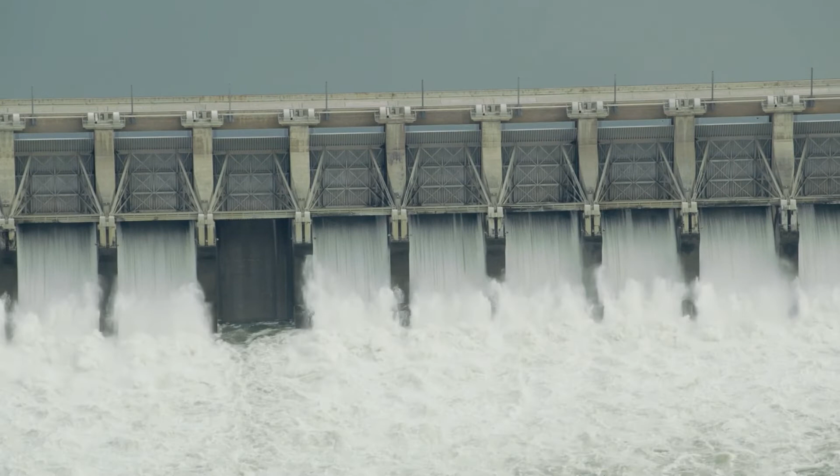Most building greenhouse gas emissions are the result of burning fossil fuels for heating energy and domestic hot water. We want to focus on moving towards electricity. Luckily, in British Columbia, we have some of the cleanest electricity in the world. BC Hydro maintains 93% of its energy to be generated from clean or renewable resources as part of BC's Clean Energy Act. The majority of BC Hydro's electricity is generated from hydroelectric dams. There are also some smaller plants made up of wind, solar, and biomass facilities.

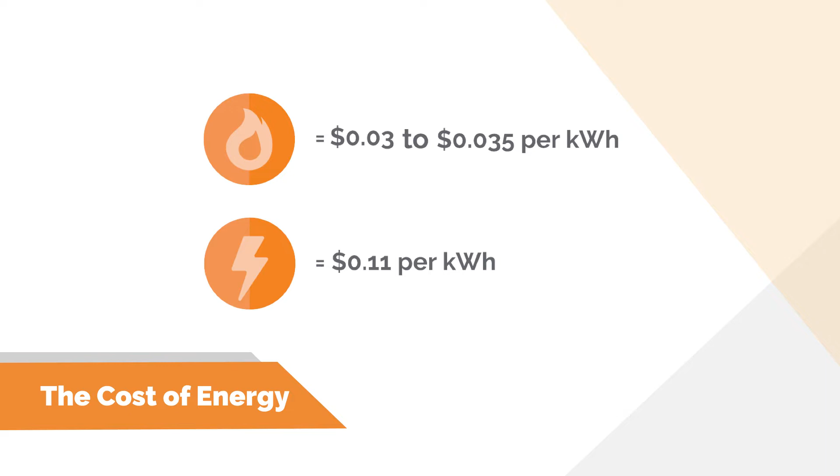BC Hydro's goal is to increase their generation, transmission, and distribution while keeping electricity affordable. Energy storage technologies are improving each year, which helps ensure electricity is kept affordable for the future. With BC's abundant supply of clean electricity, fuel switching from natural gas to electricity becomes the most reliable strategy for reducing carbon in buildings. The main reason for continuing to use natural gas in buildings is that it is still more affordable than electricity. In Vancouver, for example, the cost of natural gas is about 3 cents per kilowatt hour, and electricity is approximately 11 cents per kilowatt hour. There are approaches and technologies available in reducing operational energy costs.

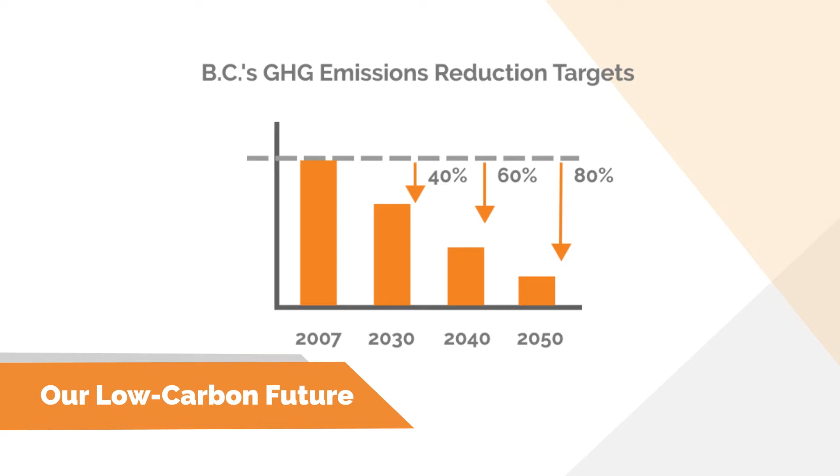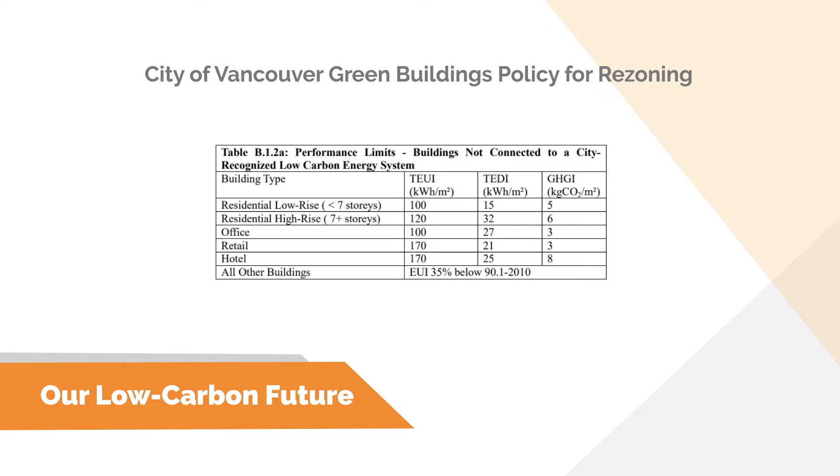The province of BC has set the bar and legislated GHG targets to be 40% below 2007 levels by 2030, 60% by 2040, and 80% by 2050. Many municipalities, agencies, developers, and institutions have recognized these targets and have set their own goals to align with the province. Most of these GHG policies have been written into bylaws and owner technical guidelines. For example, when rezoning in many municipalities, in addition to meeting energy use targets, there are now GHGI targets.

Rebates are widely available in BC for both new construction and retrofits that demonstrate low greenhouse gas emission solutions. These capital incentive programs have recently changed their baseline models from kilowatt hours of energy to GHGI targets as well. If you are an owner or developer, reach out to your consultant team or utility provider to see if you can take advantage of any of these programs.

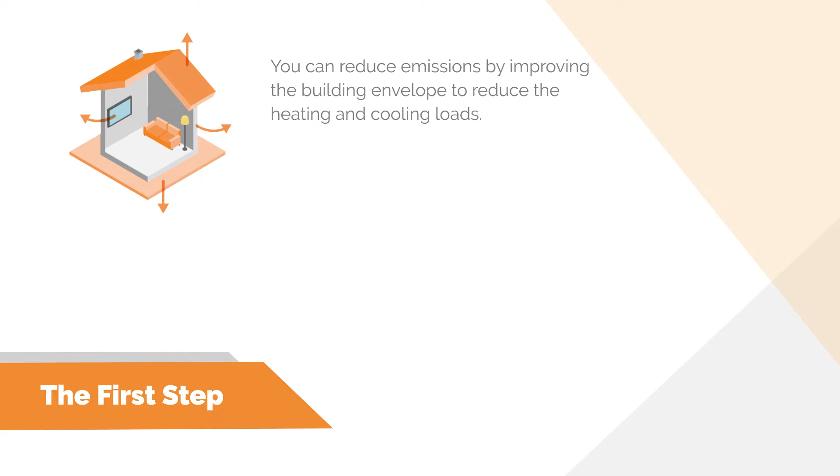The building heating systems are sized based on the performance of the building envelope. The better the insulation or the air tightness, the less amount of heat is required, which is why the first step in reducing our GHG emissions would be to first look at improving our envelope. Similarly, for domestic hot water heating systems, by using low-flow fixtures, we reduce the amount of energy required as we have less water to heat.

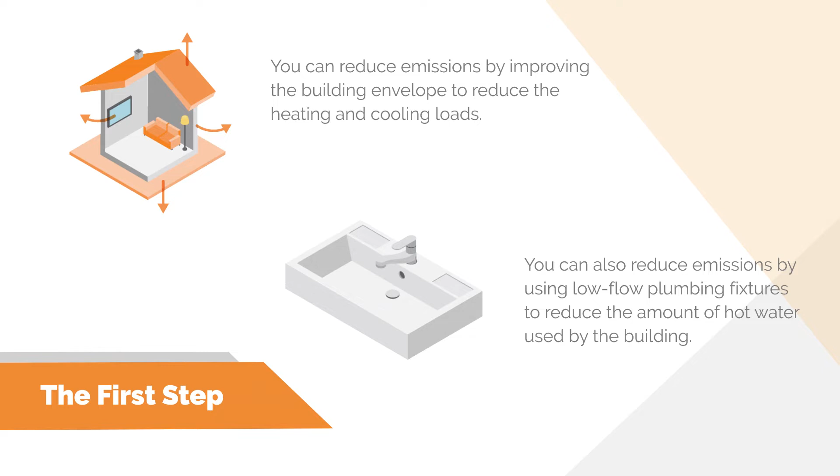There are a number of different types of heating systems for buildings. There really is no one best system. In fact, the best system for the project will depend on a variety of factors: the building type, size, energy targets, ownership, and cost.

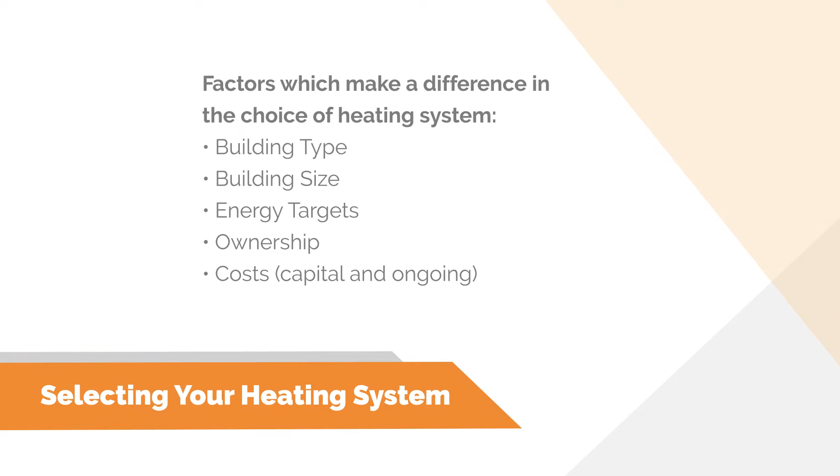Capital and ongoing. Let's review some electric heating system options. This first one is, of course, the traditional electric baseboard heater. This is simply a heating element that will turn on or off as needed to maintain the space temperature. These are generally installed with 1 unit per room. This ensures that the room that needs the heating will get the heating. This is the simple, low capital cost solution and used in many buildings.

It only needs an electric connection and a thermostat as infrastructure. It is a good option for buildings that are only providing heating. The measure of a system efficiency is based on its coefficient of performance, or COP. This is the amount of electric energy that is required to produce heating energy. For an electric baseboard heater, the COP is 1. 1 kilowatt of electric energy in is equal to 1 kilowatt of heating energy out. Although this sounds efficient, there are technologies available with higher COPs.

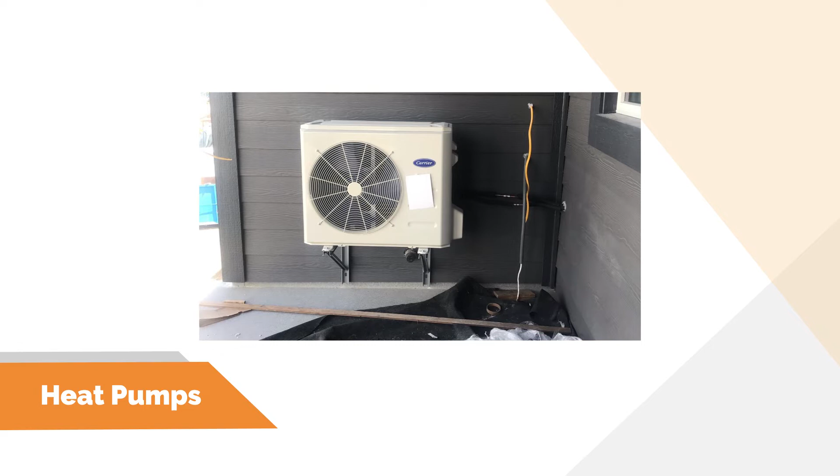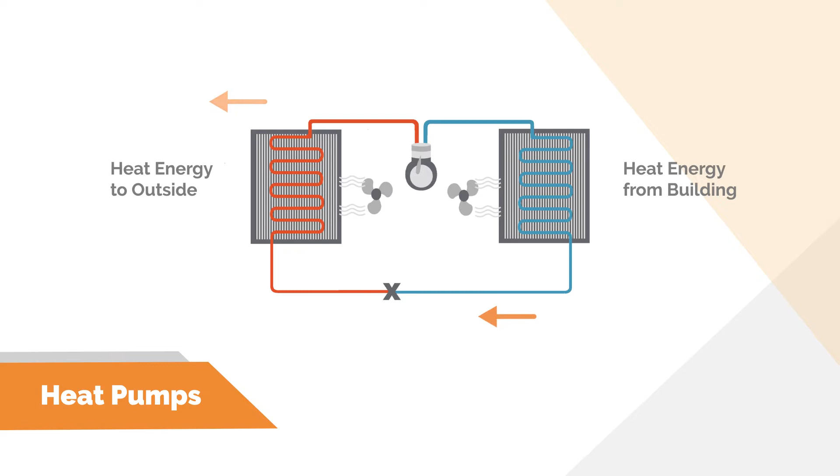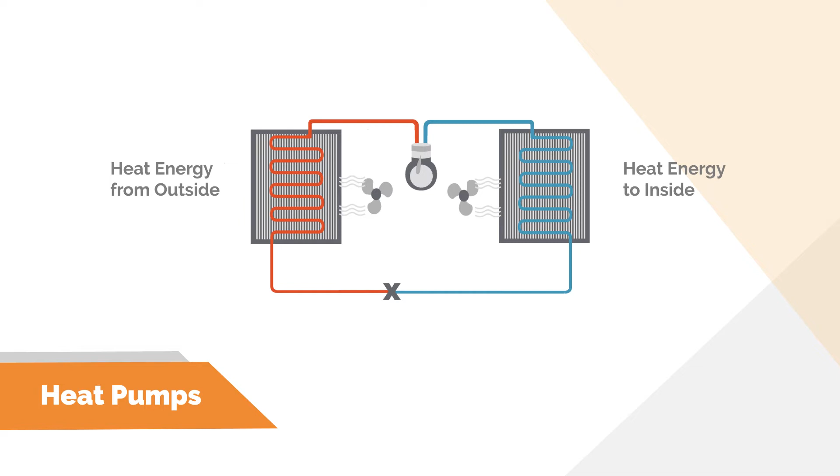The key to efficient electric heating systems are heat pumps. This technology can have COPs upwards of 3, meaning these can have 1 kilowatt of electric energy in and 3 kilowatts of heating energy out. How does this work? An air conditioner uses a refrigerant loop, which includes a compressor to move heat energy from inside the building to outside. A heat pump uses the same technology, just in reverse. It moves the heat energy from outside through a refrigeration cycle, where a compressor powered by electricity adds energy to the refrigeration loop. The system then moves that energy inside the building as heat.

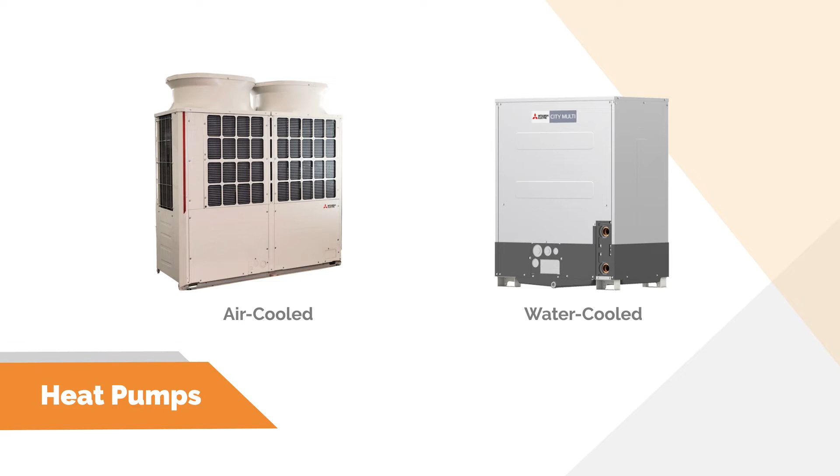With a unit of electricity in Vancouver being 3 times the cost of natural gas, using heat pump technology with efficiencies at 3 times the traditional electric element makes these technologies more cost-effective in keeping energy costs down. Heat pump systems can either be air-cooled, where the heat energy is transferred directly from the atmosphere, or it can be water-cooled, where it transfers it from a ground loop, a loop in the ocean or lake. Regardless of how cold the source may appear, there is still energy to be moved. One of the benefits in using heat pump technology in our buildings is that we can use the same system for both heating and cooling.

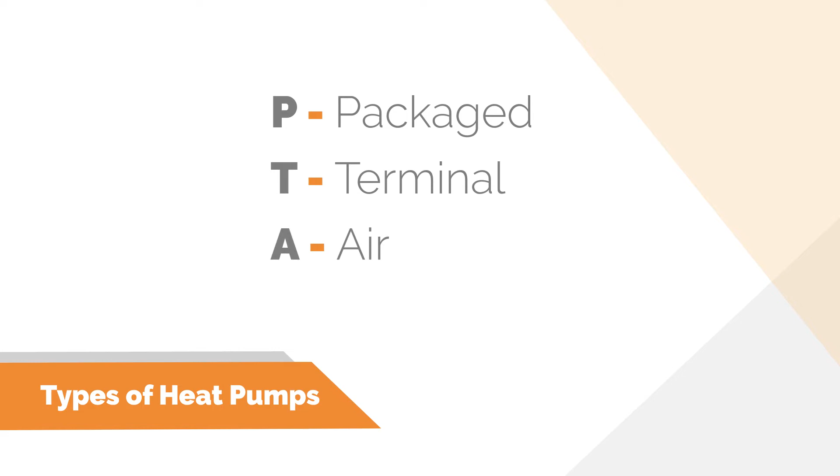There are different types of units that use this technology, and they vary in scale from small one-room units to larger central systems. Packaged terminal air conditioning units, or PTACs, are wall-mounted units installed on an exterior wall, typically below a window. These are small, packaged independent units where the entire system is located within that unit. These can be supplied with heat pump technology. It has a grill on the exterior wall, which is where the energy is moved from the atmosphere into the refrigeration loop and then into the space. The advantage of these units is that they don't need any piping or central plant infrastructure to provide the heating in the space. And with the heat pump technology, they have a high COP. Although they are efficient on their own, there is no benefit in recovering heat from a whole building perspective.

A variable refrigerant flow, or VRF, does provide for a whole building heat recovery system. There are 2 types of VRF, water-cooled and air-cooled. Both are similar in how they operate. However, the air-cooled option is the simplest to provide as a fully electric-based system. The system includes an air-cooled condenser located outside, with refrigerant piping that runs down to the building to all the fan coils in the suites. There's one small additional unit that sits in between the two, called a heat recovery box. This is typically located centrally on each floor, which consists of control valves and sensors. Essentially, it's the brain of the heat recovery system.

How it works is that when one fan coil is in cooling, the heat being moved from that suite is first analyzed by the box. If that system determines that another fan coil in another suite on that same floor needs the heat, it will move that heat to that unit. If there is no need for heat, it will move it up to the condensing unit, where it is rejected to the atmosphere. When the entire building is in need of heat, however, like in peak winter, the air-cooled condensers will operate in heat pump mode and move the heat energy from the atmosphere into the building. This is a simple package system, all supplied by the same manufacturer.

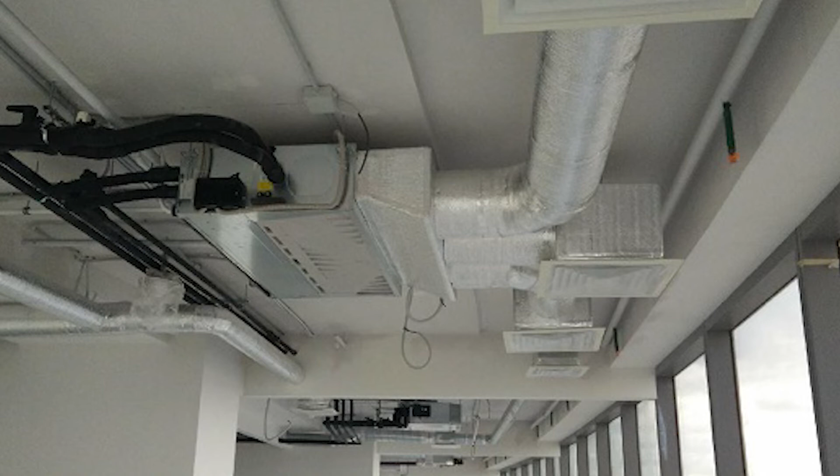This system has a high COP and is a slightly more complex system in that all the components can be from different manufacturers, which requires an independent control system design. This system does allow flexibility with different types of terminal units, like fan coils, hydronic baseboard heaters, or radiant panels.

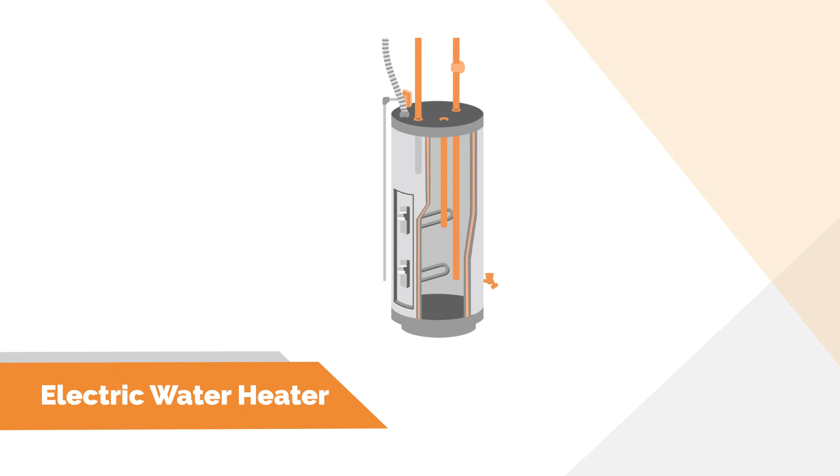Domestic hot water typically uses fossil fuels as a heating source. Similar to a building heating system, we have different types of technologies that can be used in moving to an all-electric based system. The first technology is a simple electric hot water tank. This is a heating element inside a tank that will power on to maintain a tank temperature.

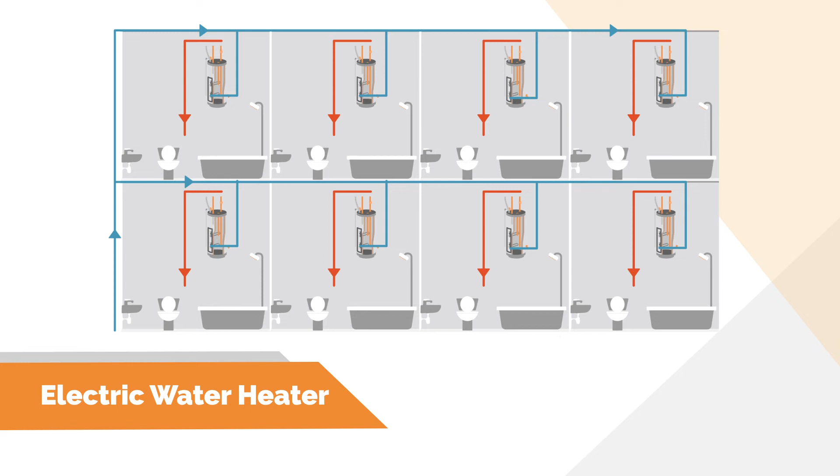This can either be installed as a central system and piped throughout the building to all the suites, or it can be decentralized, where we have smaller electric tanks inside each suite. This is a simple, traditional, low capital cost solution.

For more efficient systems, we need to look at using heat pump technologies again. This is a growing application in BC, mainly because of the many new GHGI targets that are being implemented, as discussed earlier. There are a few different methods for domestic hot water heat pump applications. These all have COPs upwards of 3 or more, making these more efficient than the typical electric domestic hot water tanks.

In a decentralized system, we can have an all-in-one domestic hot water storage tank and air-source heat pump packaged together. These units are generally smaller tanks, similar in size to the one you would have in a single-family home. The heat pump itself sits on top of the tank and will move the energy from the room into the water in the tank.

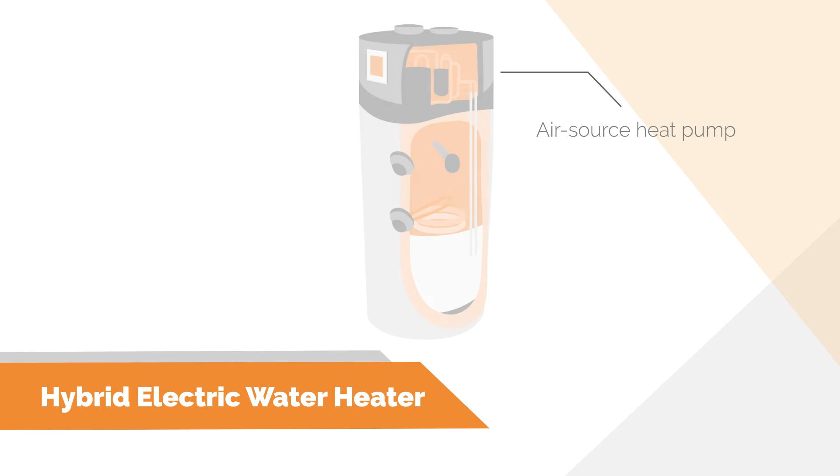This unit is best installed in a space that will generally remain warm, like a furnace room or utility closet. These include their own package controls and require no additional infrastructure, similar to a traditional electric hot water tank. We can also use the same type of air source heat pumps as we would for the building heating system for domestic hot water heating.

A central unit outside, piped with hydronic water into a domestic hot water storage tank where the water is heated and then piped to the suites in the building. This is a more complex system from a controllability perspective, however it allows flexibility in using different manufacturers for the different components. It also requires more infrastructure and is found to be most cost-effective in larger buildings.

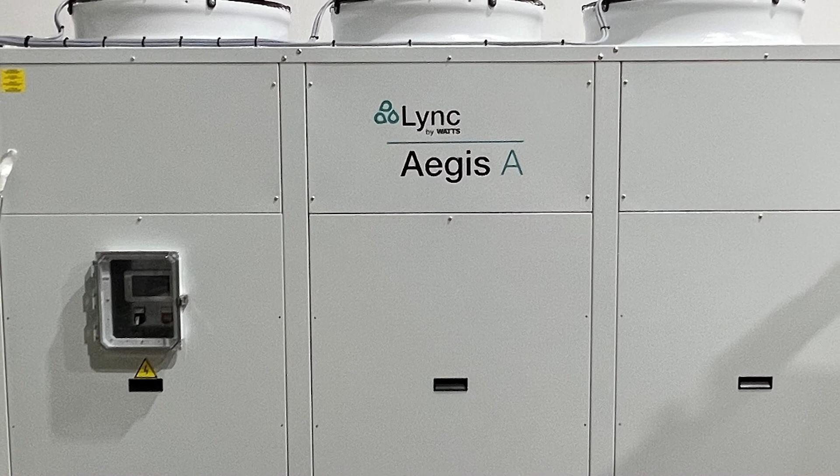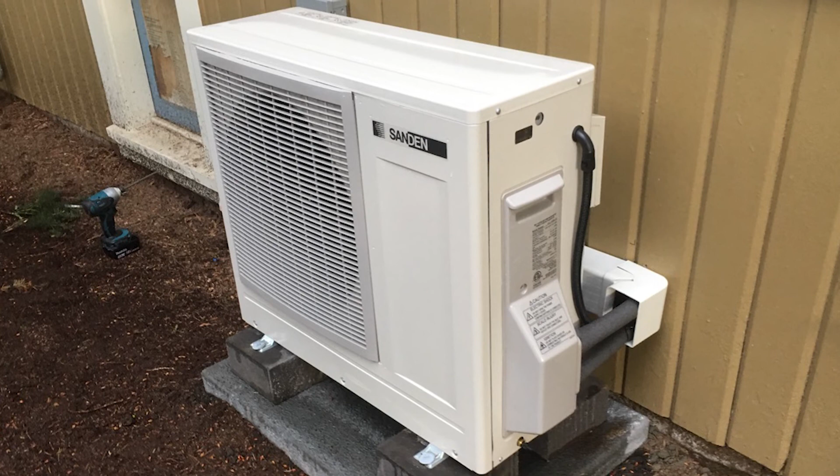There are a few new emerging technologies available, one of which is using CO2 as a refrigerant instead of the typical hydrofluorocarbon refrigerants. CO2 is a naturally occurring substance, but it is much more efficient. Heat pumps using CO2 can have COPs of up to 5. These are generally available in smaller sized tanks, like for single-family dwellings.

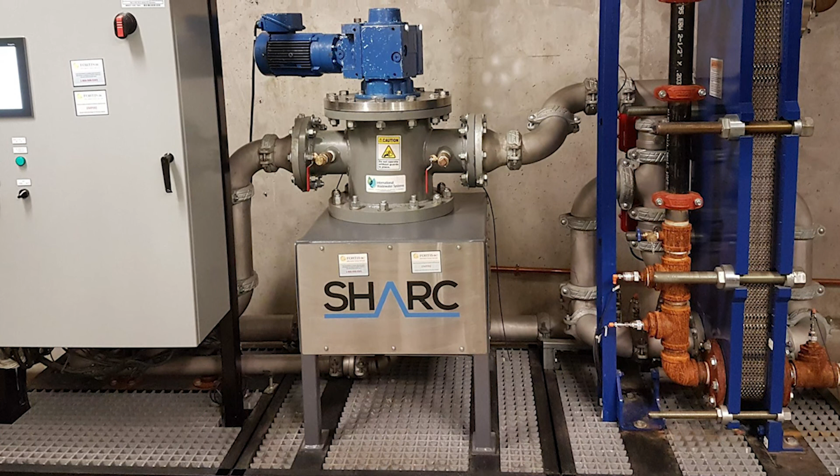For larger scale projects, we can use the heat in our sewers. This system will pump sewage through the heat pump, where the refrigeration loop then moves the heat energy into a heating water system, which then flows into a tank filled with cold domestic water. The heated water will then flow to the fixtures throughout the building. Don't worry, both sides are completely separated by the heat pump.